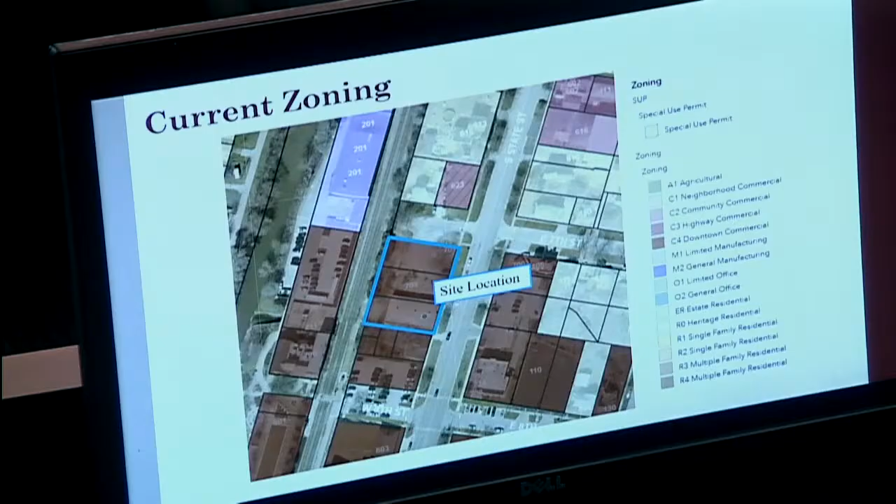Current zoning, this is a map of it, so it's C4 downtown commercial. To the east, west, and south are also C4 downtown commercial. To the north is R0 Heritage Residential and C2 with a special use permit for a carpet business. However, that C2 lot, the red one, is a vacant lot. And then to the northwest is a manufacturing district.

On the west side of the building, which will be the rear side of the building, there will be 39 parking stalls. And on the north side, there will be several parking spots for retail and commercial businesses to use. The parking lot will be accessible through 7th Street. 7th Street, as it is now, will be vacated. It's currently a dead-end street, and it will be vacated and just be used for access to this site. So we will not have any additional street access along State Street for this development.

Additionally, this property will align with the current streetscape that's along State Street and through the downtown district. Sidewalks will extend to the face of the building, and this promotes human-centered design.

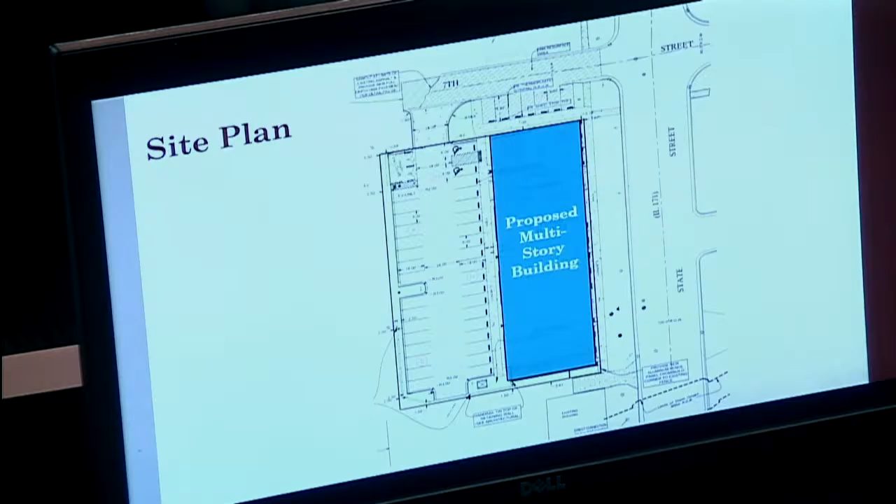The east side of the building, parallel to State Street, will have parkway trees and parkway sodding, similar to what already exists. If anything gets disrupted during the development process, it will be restored. On the northwest and south sides of the building, there will be perimeter landscaping, a mix of sod and shrubs. The north and west sides will have sidewalks for parking lot users to access the building.

Both parking lot islands will have trees and live plant materials. The far west side of the building will be sodded with additional shrubbery. There will also be a dumpster in the parking lot on the northwest side, and that dumpster will be fully enclosed and fenced like our code requires.

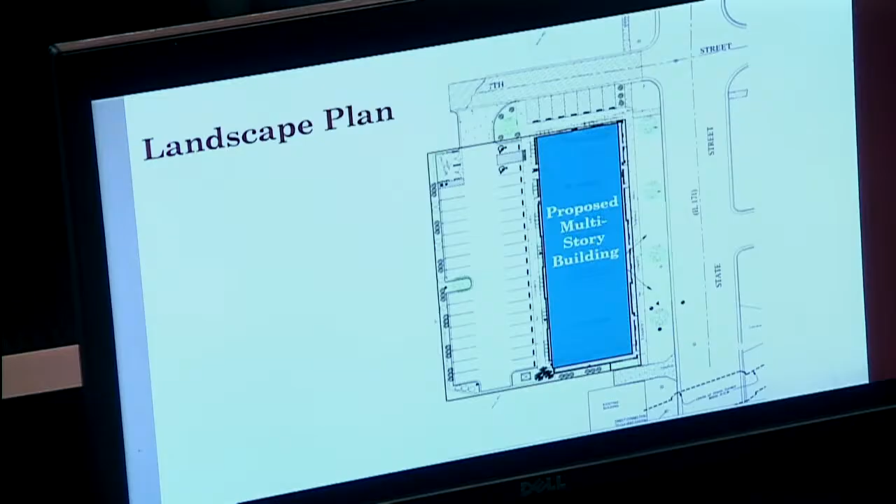For architectural elevations, they were approved by the Heritage and Architecture Commission on February 17th. The Heritage and Architecture Commission is the final deciding body within the historic district. This building will be in the historic district. So I'm going to walk you through the elevations so you can see them. However, they already have been approved by the H&A, so PZC won't have that governing authority this time.

The massing of the building, the window placement and orientation, the spacing of facades, and the differentiation of overall frontage into varying facades is similar to what we see in the rest of the historic district. That has been a very important consideration for the H&A when making their approval, that this aligns with the city's existing historic districts, although it will be a new building.

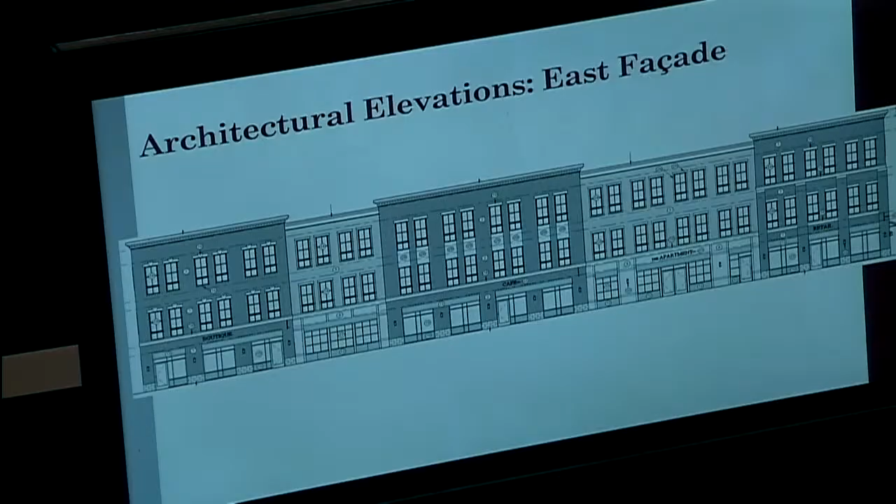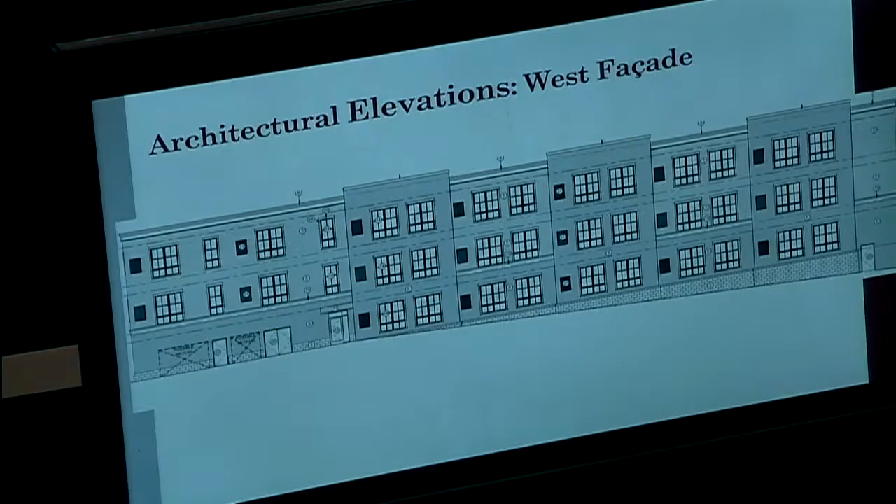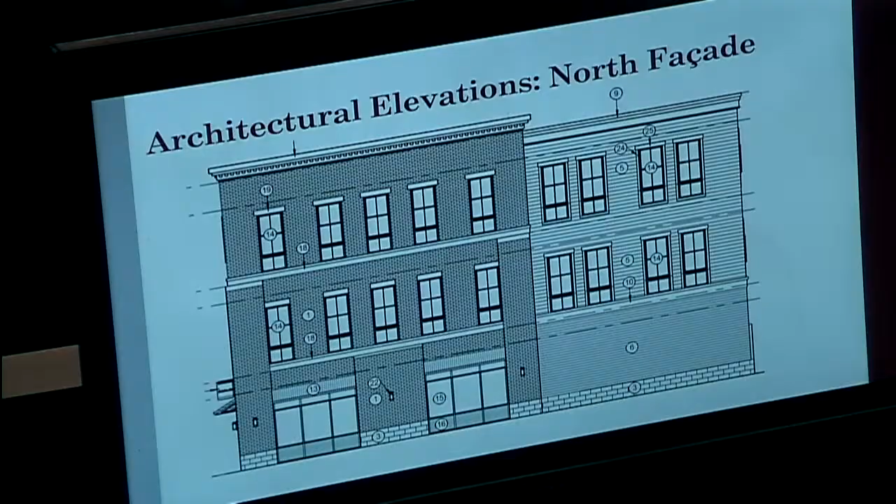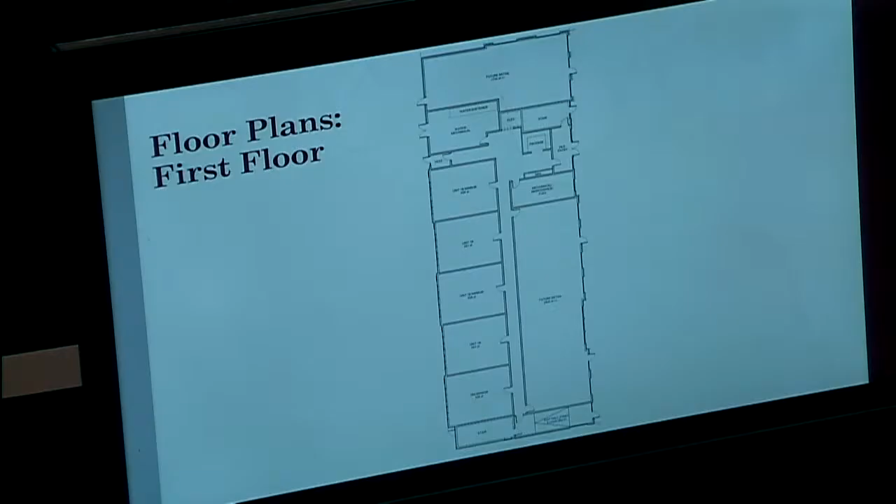For the floor plans, the first floor will be retail on the north and east sides, and then 5 apartment units. The first floor also has resident entries, stairwells, elevators, mechanical rooms, and a package room. The second and third floors will be identical, and they will each have 13 apartment units on the floors.

We will talk through the standards for special use for planned development, and if the commission finds the findings acceptable, we will go ahead and move forward with recommending this to council. The first standard: the proposed building or use at the particular location requested is necessary or desirable to provide a service or facility in the public interest and will contribute to the general welfare of the neighborhood or community.

This development will increase the supply of downtown rental opportunities, both for residential and commercial uses. There will be new tenants in these apartment units that will create economic growth for existing businesses. This building will serve as the north gateway into the historic district. It replaces a vacant building and a parking lot with a 3-story building designed to complement the historic architecture of the historic district.

The second standard: the proposed building or use will not have a substantial adverse effect upon the adjacent property, the character of the neighborhood, traffic conditions, utility facilities, and other matters affecting the public health, safety, and general welfare. Staff finds that adjacent properties will not experience substantial adverse effects. The building's architectural design will complement existing historic buildings in the downtown. The development received a certificate of appropriateness from the Heritage and Architecture Commission.

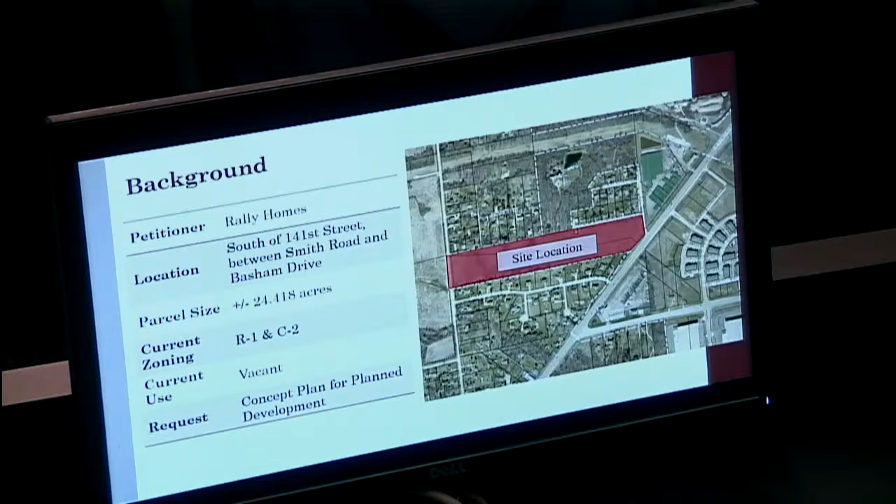This is the current zoning of the site. On the west side it's zoned R1 residential, and on the east side it's zoned C2 community commercial. The site is impressed with a special use permit for planned development that was granted in 2009. However, development never occurred, so the new applicant is coming forward and we will have to reapprove their planned development, and they are requesting a rezoning.

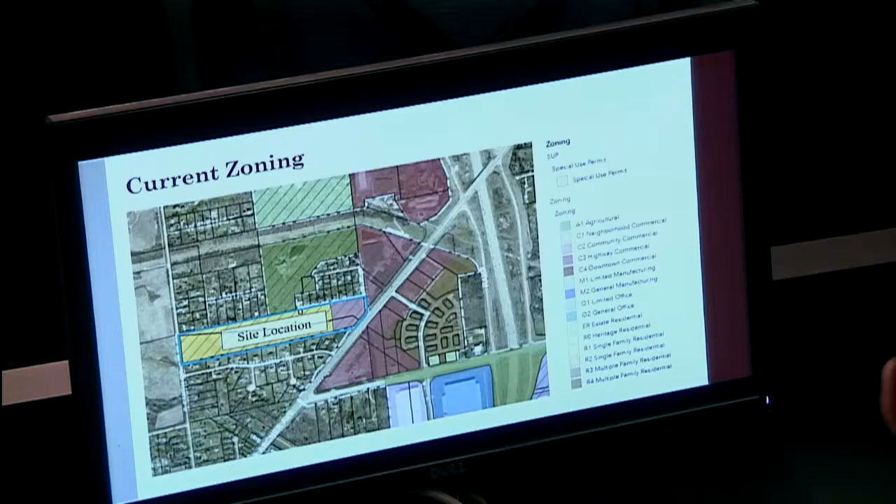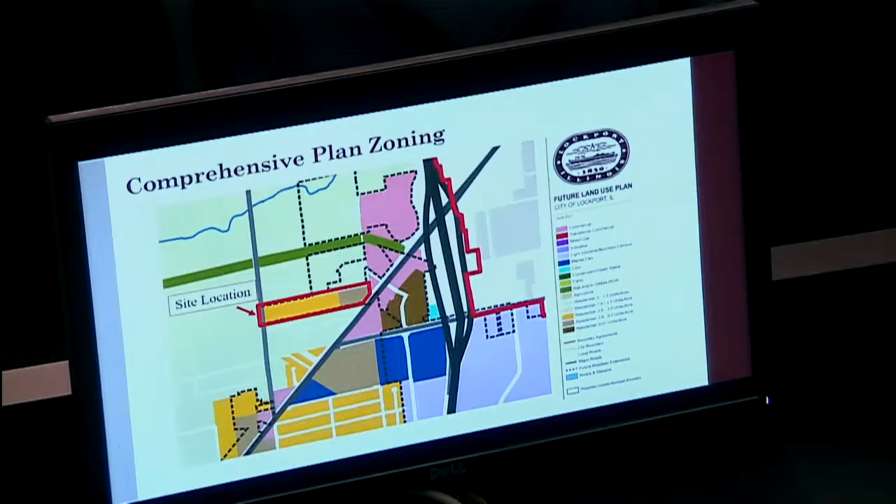There will be landscape areas as well as a wet bottom detention basin. Right now there are 2 proposed. Stormwater management will be a factor considered with later plans if this concept plan is approved, so there could be changes in how stormwater is managed through detention basins or other means. The developer will be bringing city water and sewer to the site.

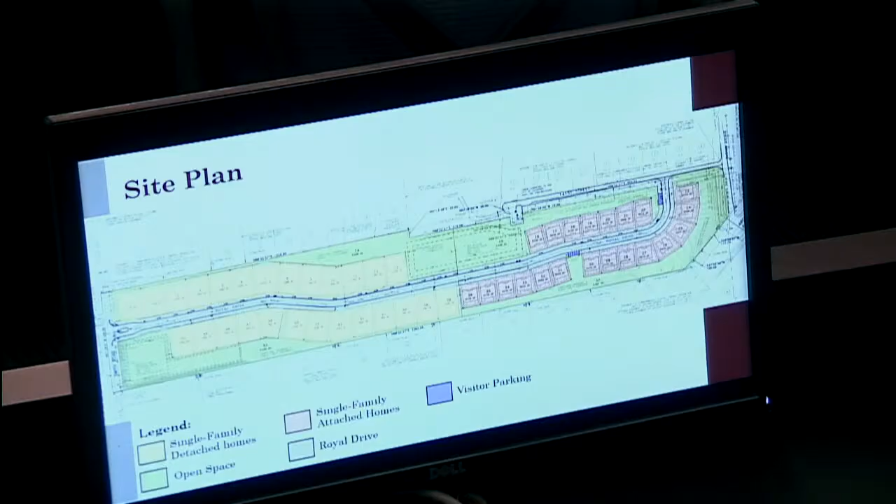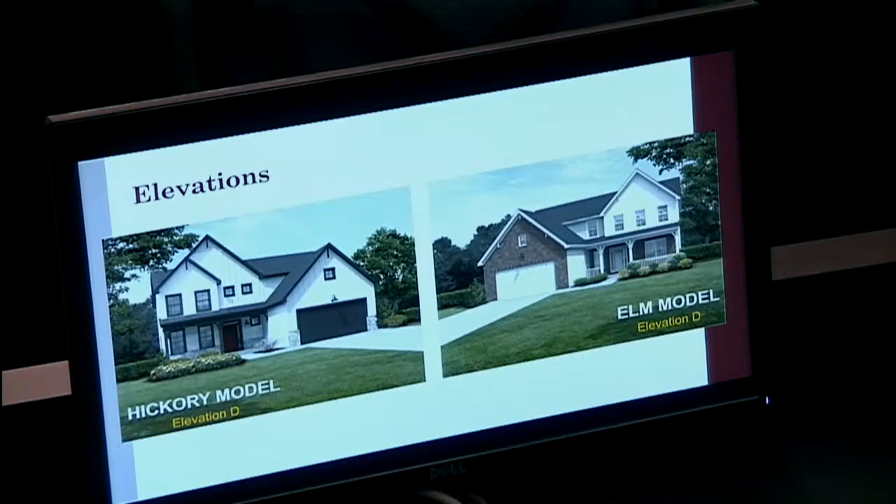These are some sample elevations the applicant has provided. The maple model would be ranch-style homes. There is also the birch model with several different elevations, the oak model also with several elevations, and a hickory model and an elm model. The Deerfield model would be what you'd see for those duplex homes.

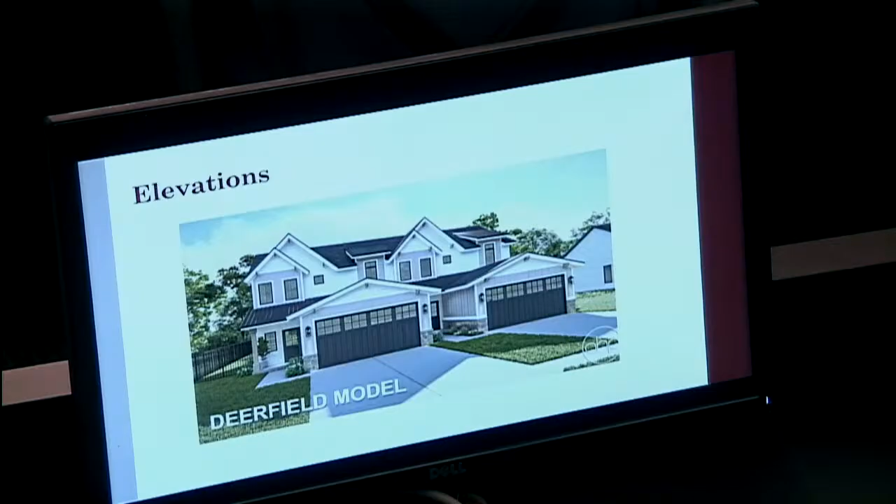So we are now at our recommended motion. Should the commission find the concept plan for the proposed 68-unit residential development acceptable, the following motion is suggested: a motion to approve the concept plan for a 68-unit residential development subject to the following conditions. The applicant acknowledges that staff has completed a general review only of the concept plan, and that a more detailed review will occur with submission of preliminary development and/or final development plans. Staff comments at this time are general, intended to outline steps necessary if the project moves forward, and to provide guidance and considerations for future submittals.

A new special use permit for planned development will be required. An amended annexation agreement shall be submitted with the submission of a final development plan application to address uses, general design standards, and other details and obligations necessary for development of the property. A future zoning request for this project will be to add R2, allowing for single-family attached units on the eastern portion of the site. Concept plan approvals are valid for 1 year from the date of approval. Approval of a concept plan provides the applicant reasonable assurance to move forward with submission of a request to rezone and a preliminary development plan, which shall be in general conformance with the approved concept plan.